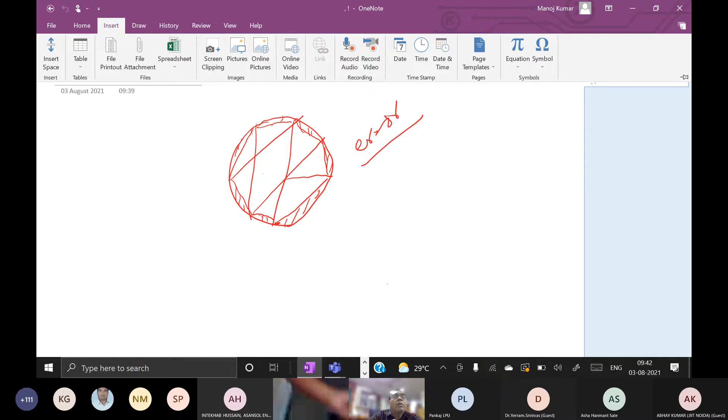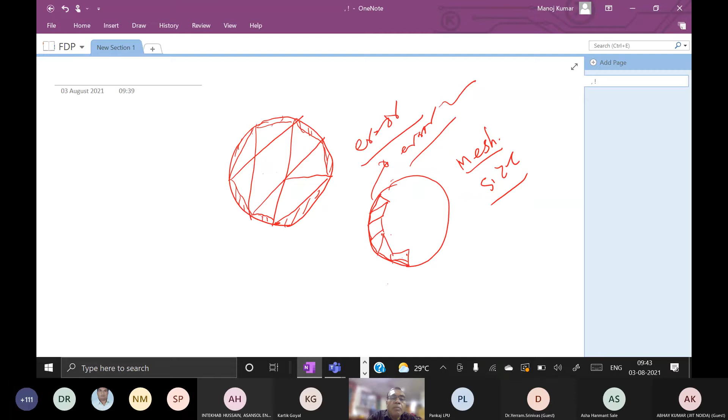Okay, not getting the pen over here. Now make the small sections. Okay, so this way we are able to reduce the error, you can see. So in this next discretization, what are we doing? We are just reducing the cell size or mesh size, so that we can reduce the error. So basically this structure, whatever you are seeing in 2D form, is basically the tetrahedron.

So FEM forms tetrahedrons in our structure, means the 3D form. And now there will be a global matrix and a local matrix. So basically what is happening? Your field distribution, maybe potential or anything else, we have to calculate at each and every point. Suppose we have 1, 2, 3, 4, 5, 6, 7, like that. This is the outer ring numbering. Inner numbering, you can see 1, 2, 3, like that.

So we have to find out what would be the global matrix and the local matrix. Along with the global and local matrix, there is also the coupling matrix. The coupling matrix is very important in the FEM. Coupling matrix means, suppose node number 1, you see how many nodes are coupled with it. This one is independent, node number 2 is independent, but this particular node is coupled with this cell, this cell and this cell.

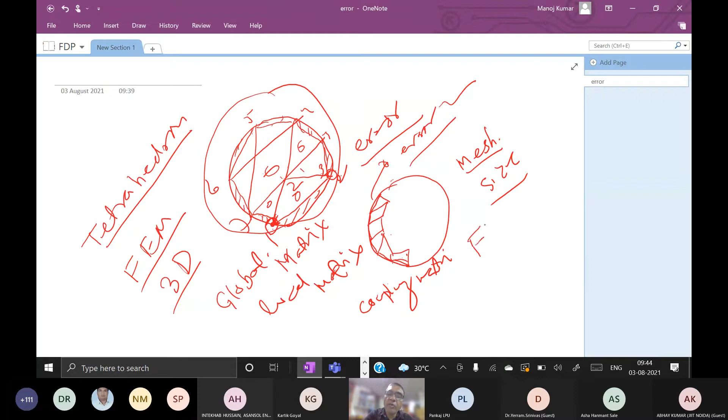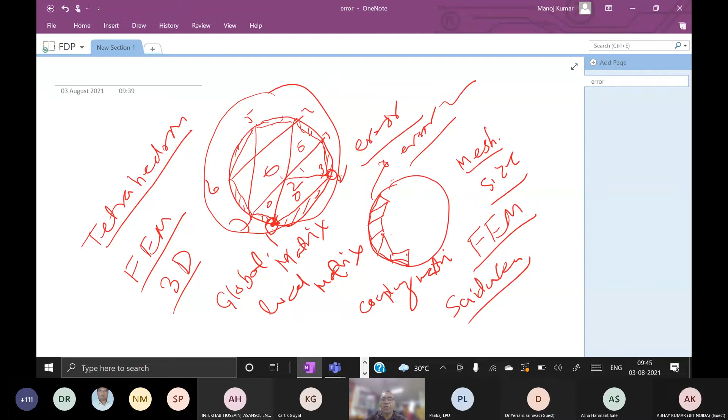So based on that phenomenon, FEM will take more time, so I'm not going into the details. This is the basic we have to understand. For that purpose, read FEM from any book; for your understanding, refer to Electromagnetic Field Theory by Sadiku. You will learn FEM and understand what is happening behind the software. That is very important, so remember this. Now I am coming to the software part. So everyone has this window, right?

Everyone has opened the HFSS window? Yes, sir. So in this window, you can see this particular portion, there is written project manager. You got this one, this project manager? Yes, sir. Okay. At the bottom, another window is properties, message manager and progress. So I think everyone is having these windows or not? Yes, we have.

So now see the first bar. This is the menu bar. You can see it's simple. Whatever menu icons we have, it looks like an MS Word or MS Office kind of thing. So we have in the menu bar file, edit, view, project, tools, windows, and help. So these are the menu bars.

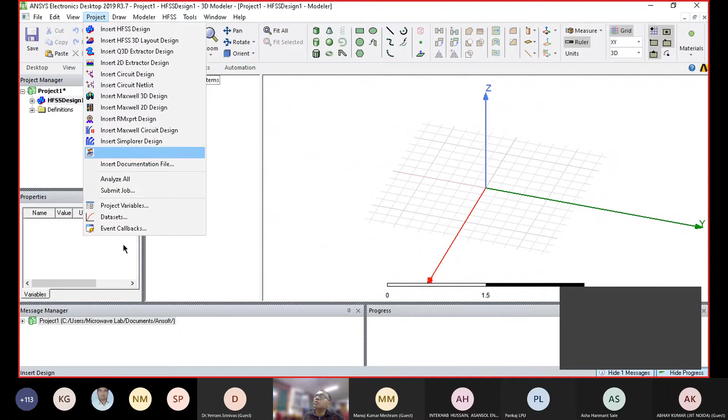Based on that, you can also see analyze. Once you make a project over here and save it, once you do analyze, you can analyze using this analyze all. All those icons, all those menus, it is also noted over here in these menu icons. It is there.

Now you can see, again I come to the initial windows. So you can see here this portion, it is visible. First, I have to open new, new file, the project.

And this is insert HFSS design. Before, we don't have anything over here. I'm just closing this one. Initially we don't have anything; all the menu icons are hidden.

They are inactive except new, open, and open example. Rest of the icons are inactive, right? So to make it active, I just click either here from the new, create a new document, or from file. Both are same. So once we have the new, once we open one project, you can see this bar, all the icons are active, except the edit one, because we don't have any drawing over here. That's why it is inactive.

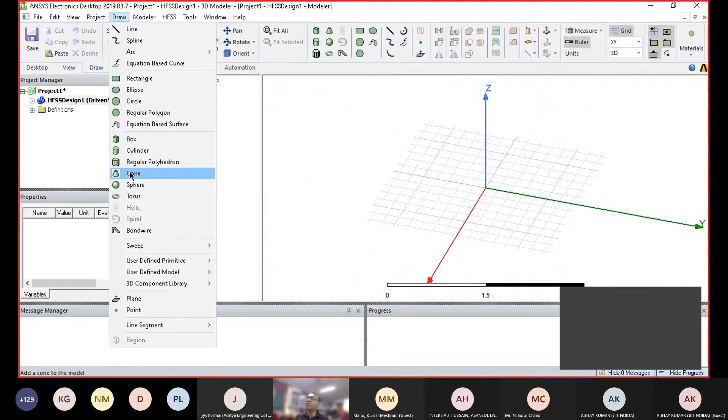So from this draw, you can use here or here. Beginners, they can just practice from here. In the beginning you just practice from here, don't move over here. I can hide this menu bar also, menu icons also.

Now modelers, this modeler is very important. Now 2015 guy, they can click modeler. Do you have the modeler? Yes sir. Okay, in the modeler, did you find the import and export option now? Yes sir, okay now you happy right?

So you will find the entire thing. There's few variations because every time they did some additions in the next editions, that's why little bit icons and many things will change. Rest of thing remains same, analytical method will remain same, because in the higher versions they are just making our life easier.

In lower versions we have to draw air box to define the radiation boundaries, but in higher versions we are creating the radiation box. This is the difference, I will let you know. So here import, export, and other things you can see.

Here assign materials, in the modeler you will find entire things, whatever you would like to do. So in the modelers option, remember...

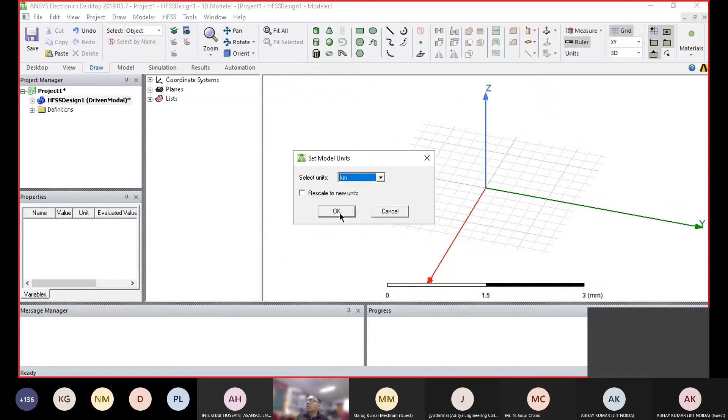But it can make, suppose in kilometers, so you can see, go to the modelers, change the unit, suppose kilometers. This scale changes, so this 0 to 1.5 area means here to 1.5 area about up to here. This is 1.5 kilometers and rest of the area is another 1.5 kilometers, this is a division. Are you getting this one?

So in the modelers, we have import, so you can import the files. You can import from anywhere from your computers, and these are the formats available with you.

Suppose if you would like to import your file from CST, import your file from any CAD files or any DXF files, you can use any one of these formats. These are the formats available: AutoCAD, DXF, these are the formats. If you have any format, then you can export over here or say import over here.

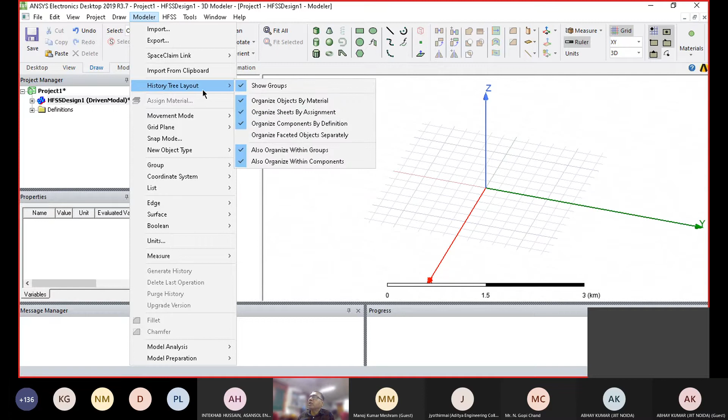Similarly, anything you can import from clipboards, history tree layout, so you can see entire things. So these are the grid planes. You just make the grid plane. Right now it is grid on the XY plane. You can make YZ plane also. So you are just changing the planes. We can change plane over here also.

This window, we can see this window. It is visible. My mouse cursor is visible. Yes sir, yes sir, yes sir.

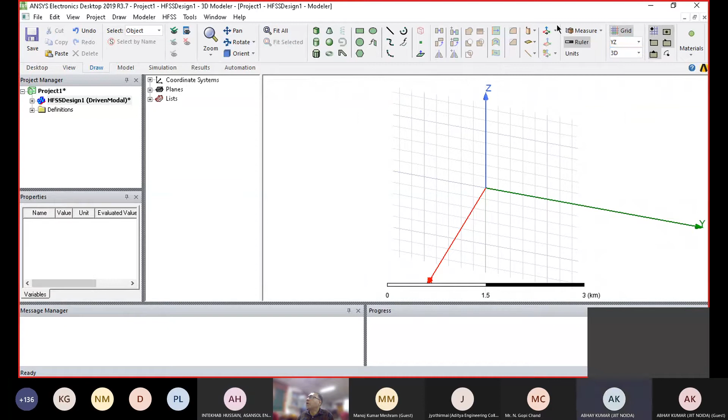So here we have the planes, YZ planes. You can see the grid window change. So which plane would you like to draw your structure? Accordingly, we have to select the plane. So by default, you will find the XY plane. But as per requirement, you just change the plane. Again, go to the modelers.

Group. So once you have the object, many objects, you can make a group. Group, ungroup, these are the things. Coordinate systems, you can make working coordinate systems. The working coordinate, create some local coordinate system also. These are things you can move, and accordingly you can move your coordinate system anywhere. And the list programs, you can create any list of the program, object list or face list, whatever.

Then edges means whatever structure edges you will find. So you can accordingly detach or create some object edges or move the edges, whatever. It's up to you. So you can do anything, any observation you can perform.

Surface. From the surface means structure surface. So in the structure surface, there are sections we have to connect. Right now we don't have any surface. Once you select the surface, then we can perform these options.

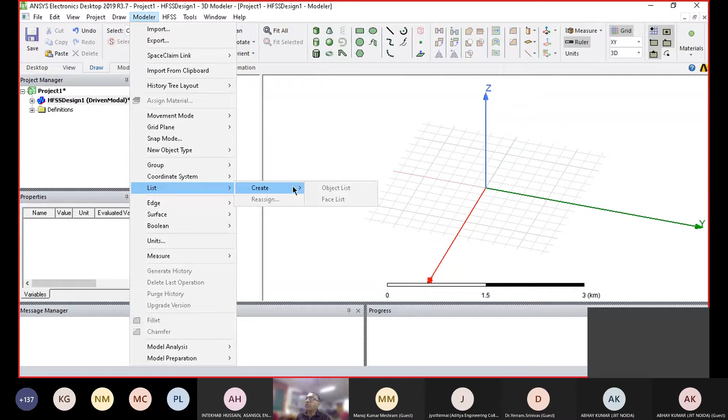Boolean. If you remember the Boolean function in the digital, okay, the same function you can unite. So if you have one or two objects, you can unite them. You can subtract, you can intersect, you can split. So these are the Boolean functions. This Boolean function is also available here in this window. It is right now inactive. These are the Boolean functions.

You can see this mouse icon. This is move. Here you can see this window. Now unite, this is subtract. This is intersect, this is imprint. Means accordingly as per requirement you can use this shortcut icon, but if you are not too much familiar, use the Boolean. Otherwise, once you have the icons, you can right click. I will demonstrate in a different way also.

Now the next icon is HFSS. This is very important because we are working on HFSS. So here we have to define basically solution type. There are various solution types available.

How many solution types do you have right now in 2019? Five. Can you name them? Network analysis, transient, terminal. Composite model. And what are the different options in this particular window? SBR, SBR plus. Yes, characteristic mode. Yes. Composite excitation. So model, you know the modal analysis, right?

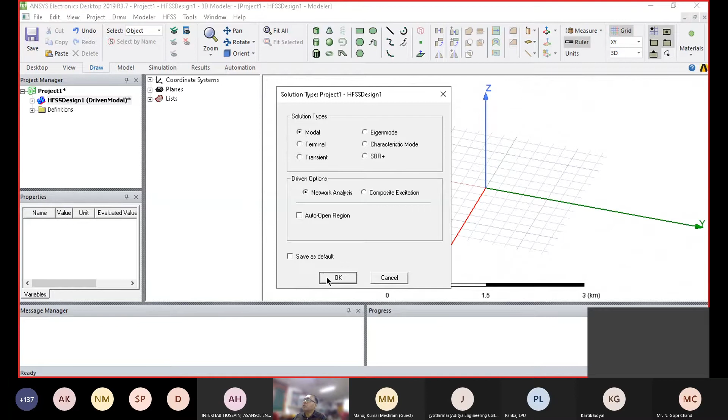And also driven option is there. So by default we are using the modal analysis. So modal is okay, so you can choose terminal also, no issue. Depends on the problem, we have to select it.

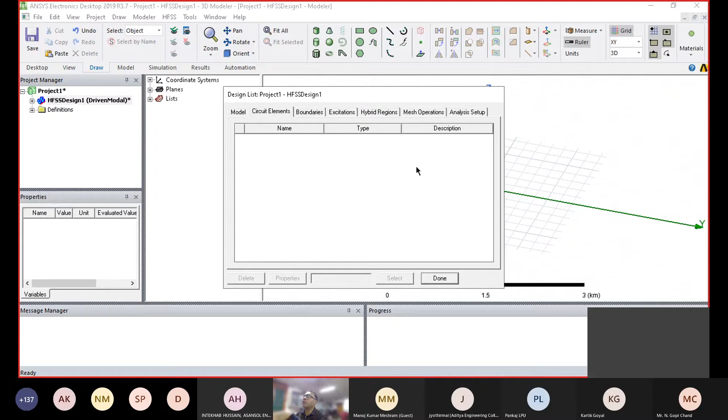Now again you can see list. So once you click the list, we will see the entire elements used in your HFSS structure. In the first model you will find anything like circuit elements, boundaries. You will find the entire thing. You can see one by one what is there. We will see later.

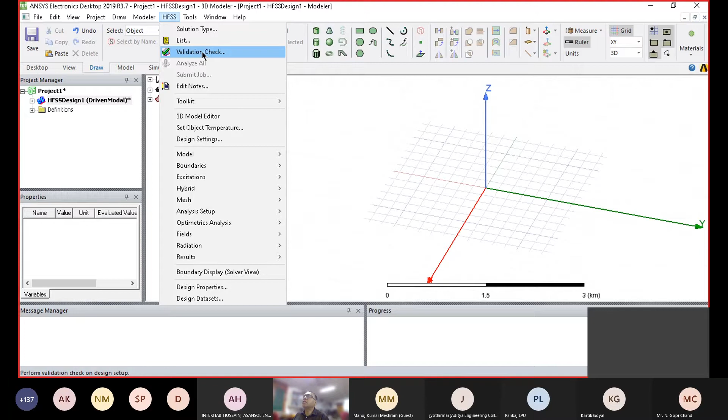Now validation checks. Once you make any geometry, any structure, before simulating it we have to check whether everything is correct or not. This is called validation check. So once you click this option, validation check, like I click on this icon, there is an error in the message manager. You can see there are no objects in the design. We don't have any design, that's why we got this error, right?

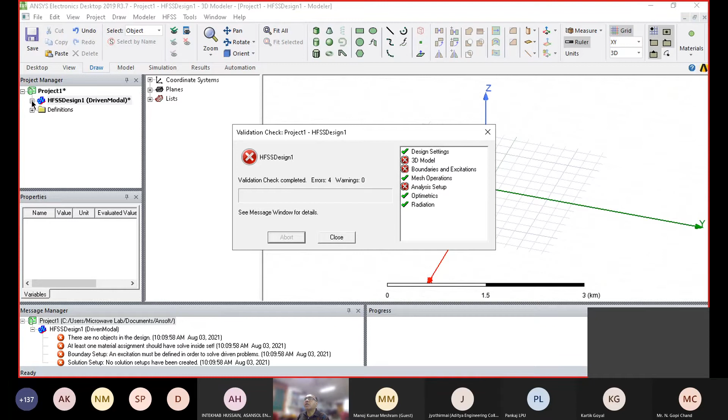It's the validation check. It is written 3D model, design settings. Design setting is okay, mesh operation is okay. This project tree is okay. You can see, first click on this one. In the design tree we have the entire thing set. But we don't have the 3D structure, 3D components. This is empty, so that's why the error is there.

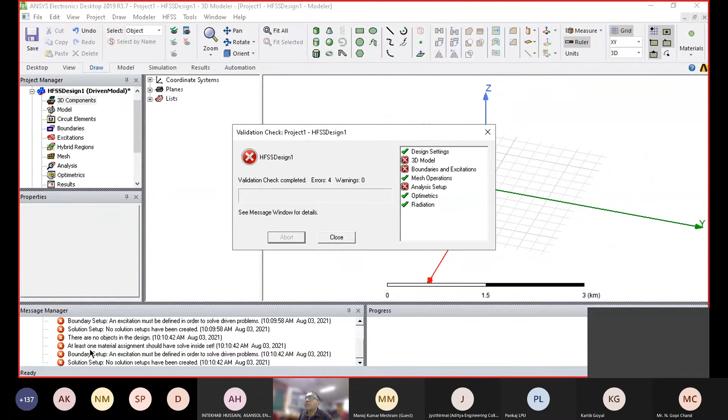Then boundary and excitation. Once we don't have the structures, we cannot excite the structures. That's why there's another error, the boundary error also. Then analysis setup. If we don't have the structures, we cannot put the frequency range and other things. We have to fix the setup. So that's why we have these 3 errors over here. I close this window and again come over here.

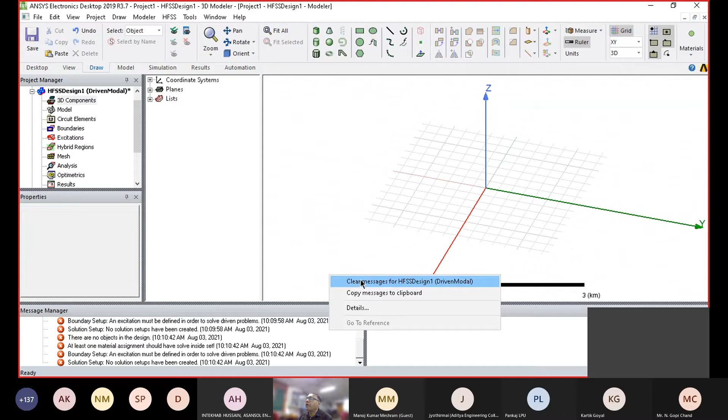Right click over here on this window. Just wait. You just right click on the message manager anywhere and clear messages for HFSS design 1, because this is design 1. So I cleared my entire message window.

Okay. Is it clear to everyone? Yes, sir. Yes.

And this analyze: once we set all the things and the validation check, we can analyze all. Sometimes it depends on our structures. In the beginning, once you have the starting structure, we will analyze the entire thing. In between, sometimes we change our frequency setup or something else, so we will analyze particular sections. We don't analyze all. You can see this one also. You can make any notes.

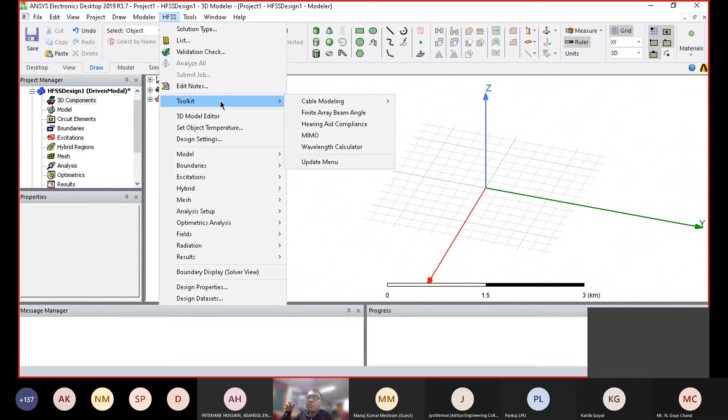Toolkit. The toolkit will give just ready-made solutions. With the help of this toolkit, you can import something and do anything. In the lower versions there is no toolkit, but in higher versions there is. This 3D model editor, so you can edit your modelers. The editor is here. Sometimes if you like temperature kind of things, you can set the object temperature also. Design settings you can change.

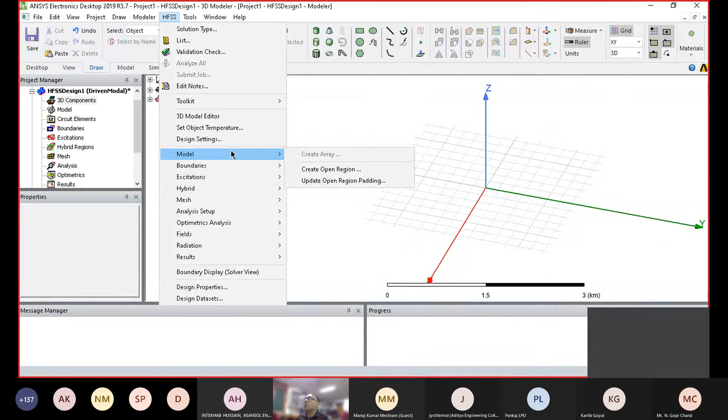And now the important thing over here, like model. In HFSS, once you would like to make an array, go to HFSS, model, create array. Once you have one structure, you can make an array of these structures. Also, as I told you, these are the new options: create open region and update open region paddings. These are new, not available in 2015. So instead of making the airbox, you can just create open region.

Boundaries, we have to assign the boundaries. These are the boundaries for assigning. Anisotropic impedance boundary, aperture boundary, finite conductor boundary, half space boundary, impedance boundary, layered impedance. So these are the boundaries.

Normally in HFSS, whatever structure you are considering, maybe a small one, you are using perfect E or perfect H. If you are defining the conducting layer, sometimes you define perfect E. It's up to you. Sometimes we define the master slave boundary also. This master slave boundary we define in metamaterial structures. Radiation boundary: for the free space boundary we define radiation.

Yes, please. Can you just be a bit slow? I'm noting down the different boundary conditions, sir. Just a bit slow, sir.

Okay, got it. So in the boundaries, boundary means boundary conditions. We are assigning boundaries as per our requirement. Like in the beginning, most of the time you are defining the conductor with perfect E, right? Am I correct?

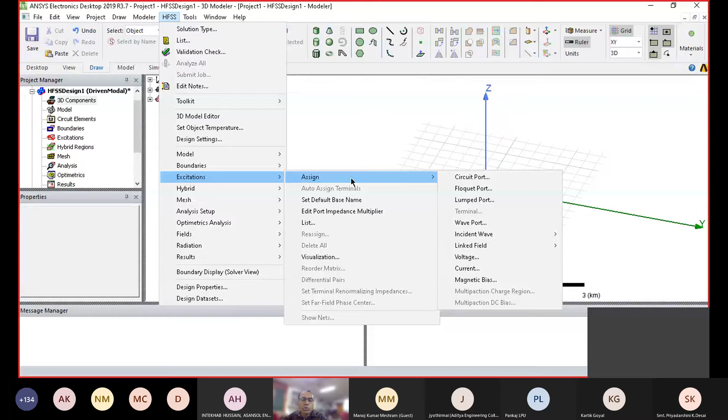Basically excitation means this is our electromagnetic source. Once we have any wire or patch antenna, we have to give some excitation. You can see there are various types of excitations. Circuit port is there. If you have an RLC circuit, we can define a circuit port. If you have a Floquet port, where is the Floquet port used? Any idea? Where can we use the Floquet port? For absorbers, metamaterial type structures.

That is fine. My question is different. When are we using the Floquet port? Obviously, we use it in metamaterial structures. But why are we using it there? My question is related to this. Why do we use the Floquet port with the metamaterial absorber? Why not use a lumped port or wave port? Any guess?

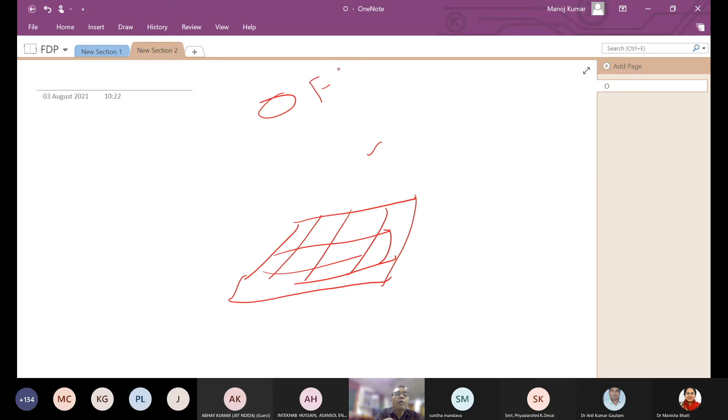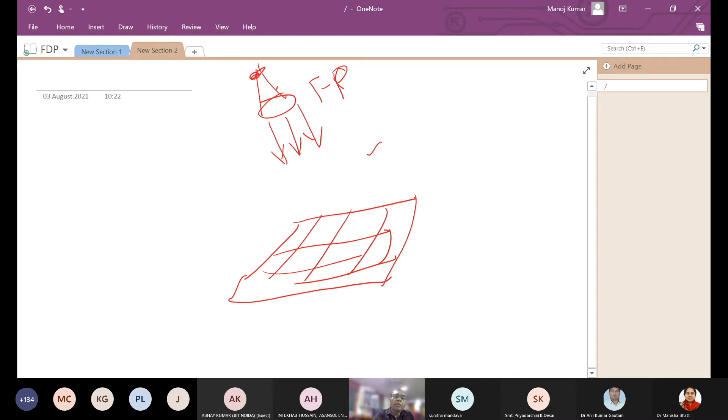Okay, so you just think about this. This one is a structure, any structure, and there is some source. Maybe this is the Floquet port. Okay, this one port, maybe some antenna. This is one antenna. So electromagnetic waves are coming over here. So what is happening right now? Just see this experimental setup. In the lab you must be doing it like this. You just think there will be some screen, and this side we have the antennas. Okay.

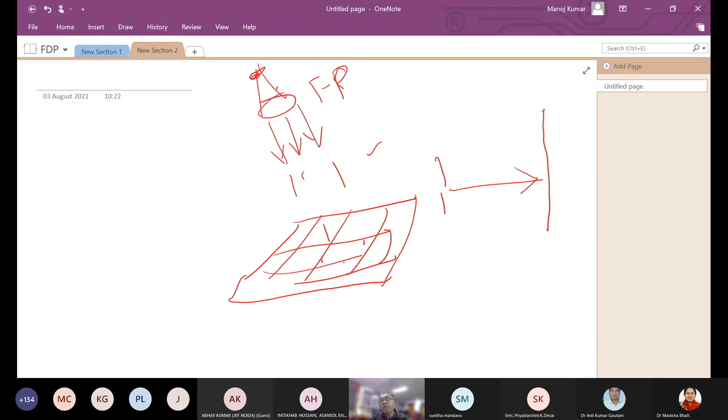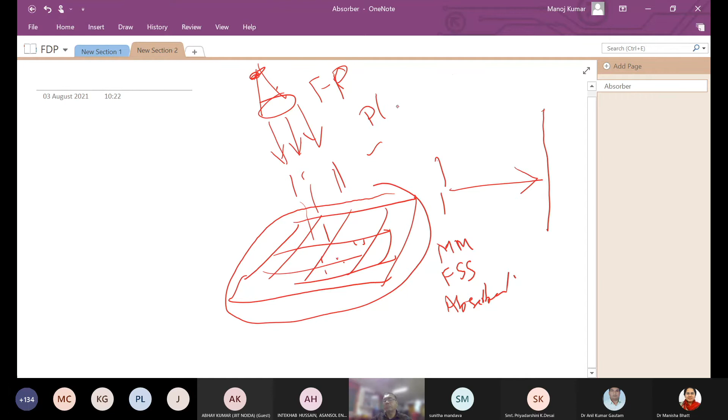Can you think about this one? So same thing, same arrangement we are making in HFSS. We have these absorbing boundaries, absorbing materials, metamaterials, FSS, or any kind of absorber we can say. And this is the incident wave coming over here, right? Okay, this is the Floquet port, plane wave. Are you getting the answer? Why are you selecting this particular thing? Yes, sir. Okay. So Floquet port, plane wave.

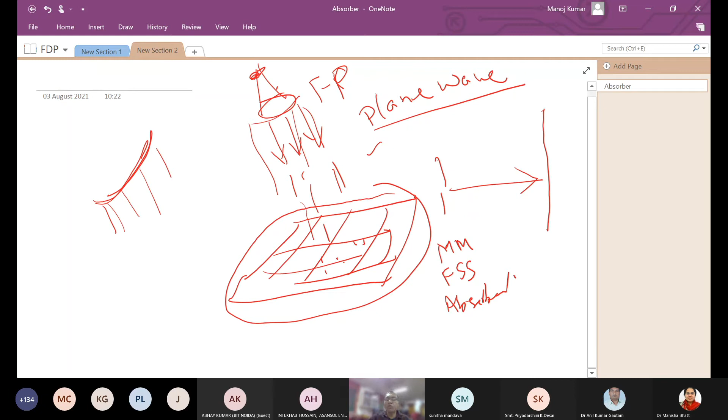The incident wave would be the plane wave. So we are making such a distance where the spherical wavefront will convert into the plane wave. Initially at the horn antenna or any antenna, we have the spherical wavefront that can be converted, up to a certain distance, into the plane wave, right? So with the help of these Floquet ports, we are converting to the plane wave so that your entire structure can be illuminated with this. Right? Is it clear?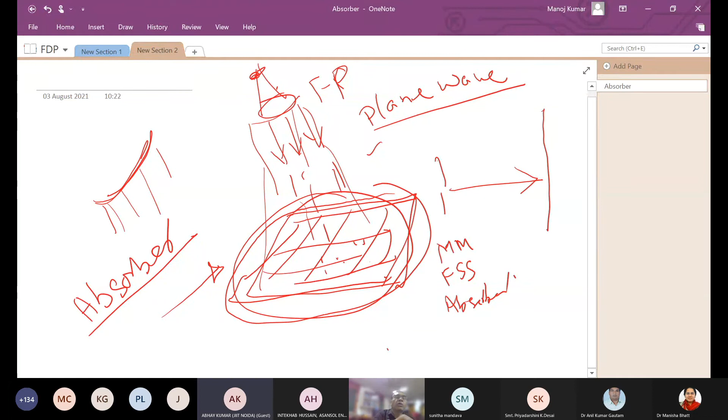Yes, sir. Okay. Suppose this structure is an absorber. If this structure is an absorber, then what will happen? It is going to absorb a specific range of frequencies. Yeah, so it will absorb the particular frequency signals, right? And nothing will get back. So how can we detect it? How can it be detected? On the other side, we need to use another Floquet port. So you need another side or the same side? Another side. Or on the same side also, we can see with some particular angle whether it is reflecting or not.

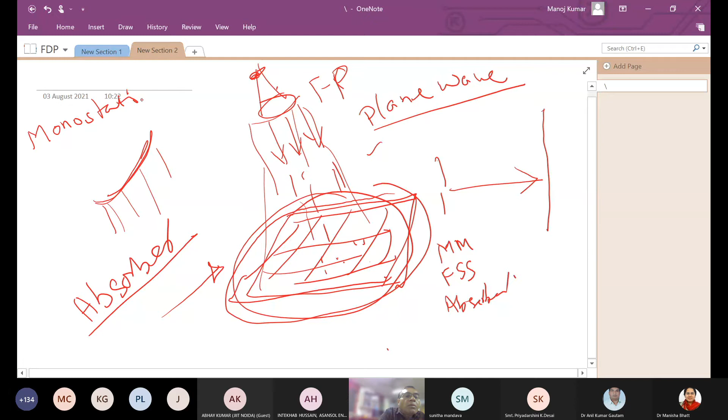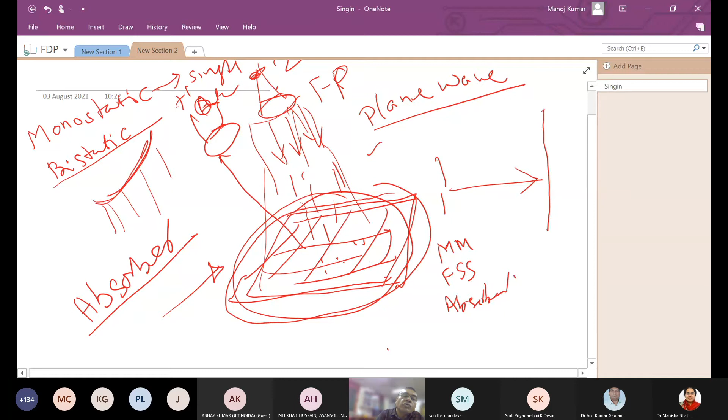Okay, so basically on the experimental side, there are two methods. One is known as the monostatic method. Another one is the bistatic. In monostatic, you will use a single antenna, for transmission and simultaneously for reception. In bistatic methods, we will use two antennas, number 1 and number 2. One antenna transmits, and the other antenna is used as the receiver. Is it clear? In the bistatic method, there will be one transmitter and another for reception. For the single antenna method, meaning monostatic, we will transmit and we will receive. Okay.

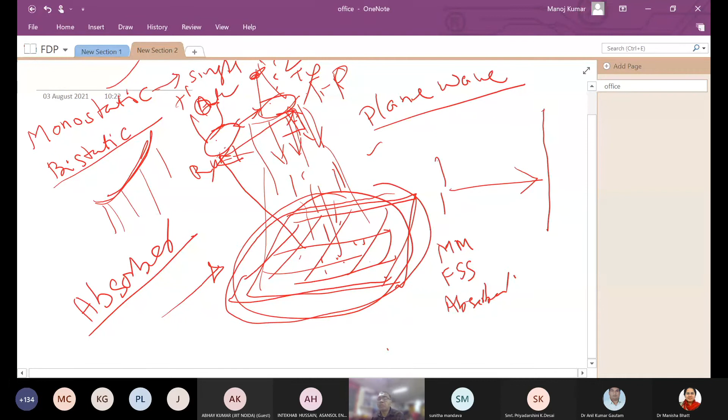Now, the important thing when you are using the bistatic method: the mutual coupling of these two antennas is very important. So you should take care of this. How much is the separation between these two antennas from center to center? It is very important. Now I'm coming to that.

Screen is visible? Is my other screen visible or not? No, sir. No, sir. No. Switching from one screen to another sometimes creates a problem. Still not visible? Not visible, sir. Now visible, right? No, sir, not yet. Just wait a couple of seconds. Visible now? Yes, sir, it is visible.

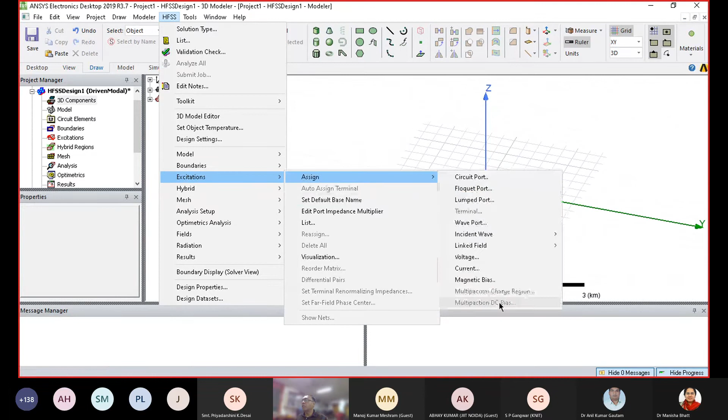And there are some auto-assign terminals. So, you know, don't use these. Use this assign and this one. For your applications, it will not be useful. Then,

hybrid. In old versions we don't have the hybrid; assign hybrid means you can define hybrid models. In the recent version, I told you initially HFSS used the FEM. Right now the hybrid method can be used. IE region means integral equation, so with integral equation you can use FEBI. SBR bouncing, there are many things. You can assign accordingly.

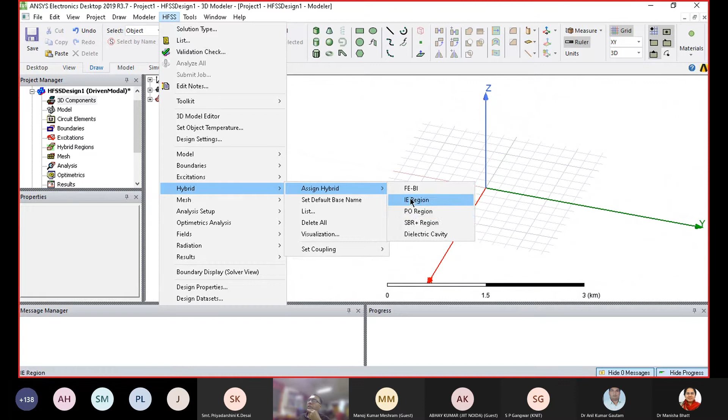The next very important thing in HFSS is the mesh. What you are doing normally is not playing with the mesh at all. Is anyone playing with the mesh of the structure? We used to do it in FEKO software, but here we don't. So by default, whatever mesh is considered by the software, you are very happy with that, right? Am I correct? Then why has this icon been added here? You are not playing with these: assign mesh operation, reassign, initial mesh settings,

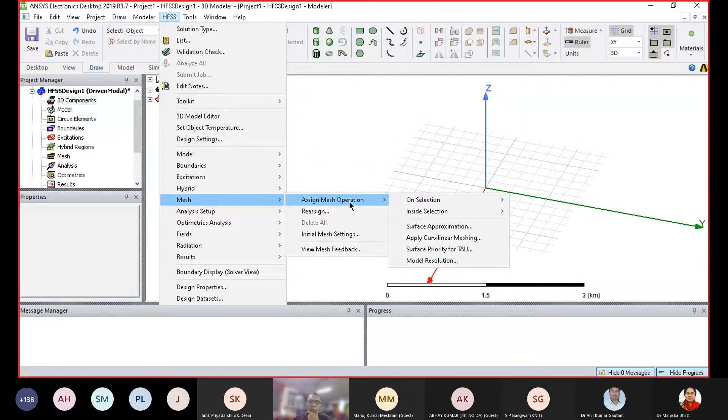view mesh feedback. Because FEM works on tetrahedral meshes, if you are not playing with these mesh operations, how can you assure your results are reliable? How can you check the reliability of your results? Whatever result comes, you say my result has come. But maybe you have had this experience: one day you simulated an HFSS design on your laptop or desktop, and after six months you simulated the same design on another machine, and you find the result has changed. Did you observe this?

Yes, sir. So is it the correct way? No, sir. What is happening? We simulated some results today; after 10 months we simulate again and the result has changed. So this is not the correct way. We cannot rely on those results. If the result changes from machine to machine, no one will rely on your results. So reliability is very important.

We have to fix the boundary condition, we have to fix the mesh operation, we have to fix each and every component. When you simulate the same structure, your entire conditions should remain the same, meaning your mesh operation should remain the same. Because depending on the RAM and processor of the system, it will calculate the mesh size accordingly. If your RAM will not support a higher mesh size, the system will calculate approximate meshes and give that result.

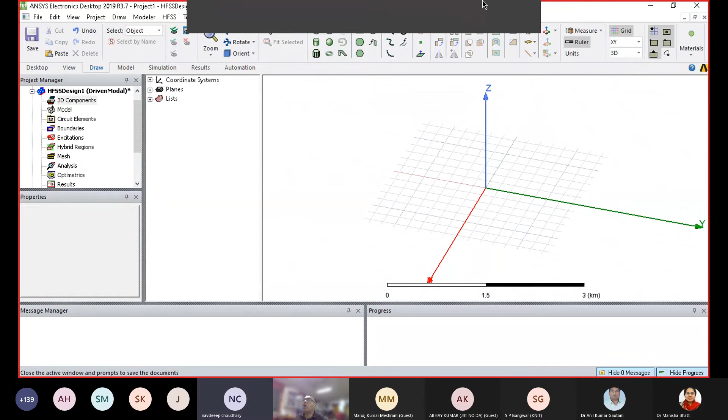Now it is clear. So you have to play with these. Mesh: initially, no need to play. Initially, whatever structure we have, we simulate it and look at the mesh first, what kind of meshes have been formed. Based on that, we can analyze whether our result is correct or not, reliable or not. We can learn this also.

And analysis setup. What do we do in the laboratory when we have a horn antenna or patch antenna? Simply putting the antenna on your rooftop or somewhere else, can you get radiation? No. We have to connect an electromagnetic source to the antenna. We have already connected the excitation part. Then we have to select the frequency range, make the solution setup accordingly, and define from which frequency to which frequency and which kind of solution we are looking for. Then we can start the measurement. The same thing here.

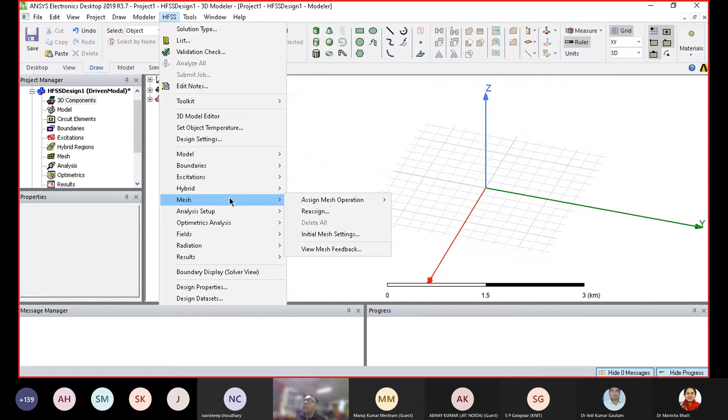Next, Optimetrics analysis. It is very important for optimization. In Optimetrics analysis we can add parameters, parameters from files, and optimization, so we can do sensitivity analysis, parametric analysis, and everything.

Am I audible? Yes, sir. Is the screen visible? No, sir. Yeah, because I got some messages like that. Now visible or not? No, sir. Still not visible? No, sir.

So, okay, we can continue. The HFSS is opening on your desktop, right? Yes, sir. Okay, so you can see your screen. Then Optimetrics analysis. It is on your screen, right?

So you can perform any analysis: parametric analysis, optimization, sensitivity analysis. Sensitivity analysis means it is a function, any function which can be differentiated with respect to any dimensions or any parameters. Like suppose you'd like to do the sensitivity analysis for your permittivity, how your dimensions are affected with respect to permittivity.

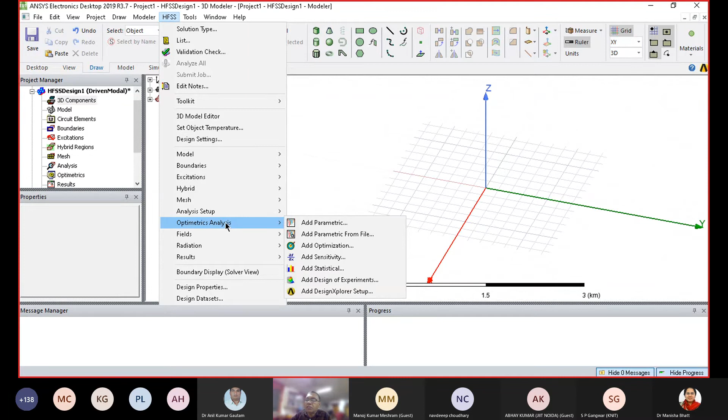So next, this Optimetrics analysis is available in all the versions, right? There will be no issue. The next icon, you can see the fields. It is very important again for calculations.

And also, how many guys are working on MIMO antennas? Is anyone working on MIMO? Yes, sir, only Pankaj. Okay, Lovely Professional, LPU. Pankaj from LPU. So in MIMO antenna, are you using a number of excitation sources, port 1, port 2, port 3, port 4, like that? Yes, sir.

So did you fix the sources to each element? Like I'm clicking on edit source, here. Right now we don't have ports. So here the magnitude is 1 watt, 1 watt, 1 watt to each element. Have you used this one? Yes, sir. And sometimes matched termination also. Did you use the matched termination?

Because in MIMO analysis, when you would like to calculate radiation properties or other MIMO characteristics like diversity parameters, at a time one port is excited and the rest of the ports are matched terminated. Experimentally we do the same thing for analysis purposes. But practically all the ports are excited at the same time. For analysis we cannot excite a signal from all the ports at a time, so one port is excited and all the rest are at matched terminations.

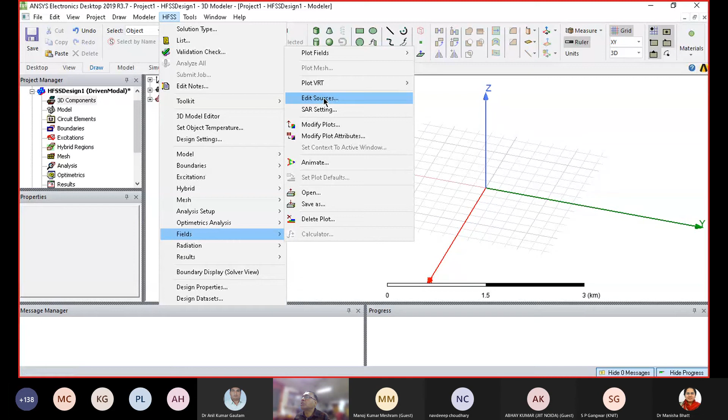Then how will we apply matched termination in the simulation software, HFSS? Because in all the ports we have the source 1 watt, 1 watt, 1 watt. You can change to 2 watt or 100 watt, no issue. But how can we convert this source into matched termination? We can apply the signal on one port and 0 watt on others. Exactly. Going to fields, edit source, we change the value to 0. One port with 1, rest of the ports 0. This is very important.

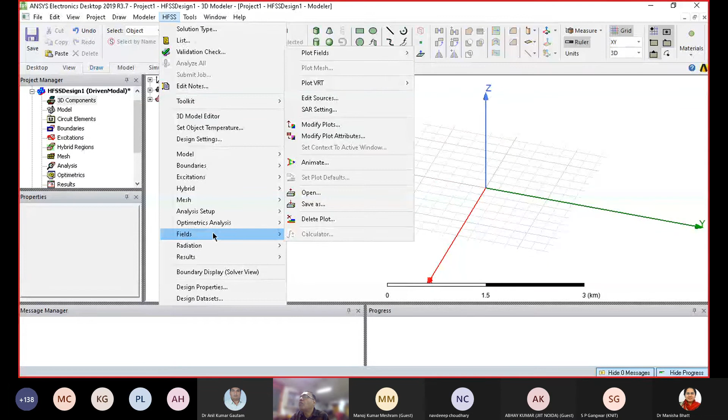Now, there are also SAR settings if you would like to perform those. You can also plot fields and animate how the field is moving. So these are the parameters available to you. You can perform radiation. In radiation, we insert far field setup, near field setup, antenna array setup, various setups. Normally we insert the far field setup so that we can get the radiation pattern. Right?

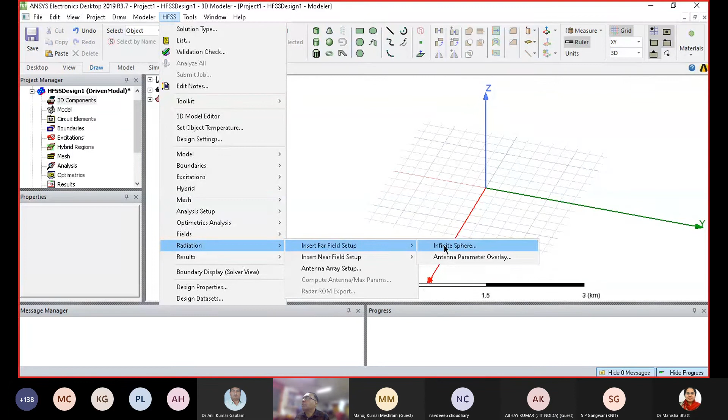Once you see infinite sphere - right now we don't have anything set. So first we have to define the radiation boundary, then we can do it. Okay, otherwise not.

Results you can see in various formats. First we can create the report from file. You can delete the entire report. The report template you can set it. Data set solutions you can see.

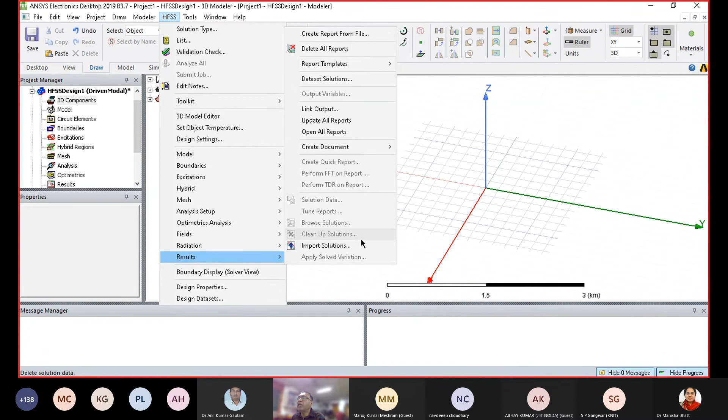And although there are cleanup solutions, most of the time what happens is once you have simulated your entire analysis setup, your results are stored as a cache file. So sometimes you delete and edit, but you are getting the same results. This is because your cache has been stored in your system. So we have to delete, clean up entire solutions. Once you click entire solutions, your entire result will be gone, meaning your failed calculation will be gone. Then you can start running and you will get fresh solutions. This is important.

Tools, you will never use tools. And basically help windows - we can see which windows are working, and help. If you need any kind of help, you can go here and HFSS topics are there, and HFSS PDFs are there. Accordingly, you can solve your problem.

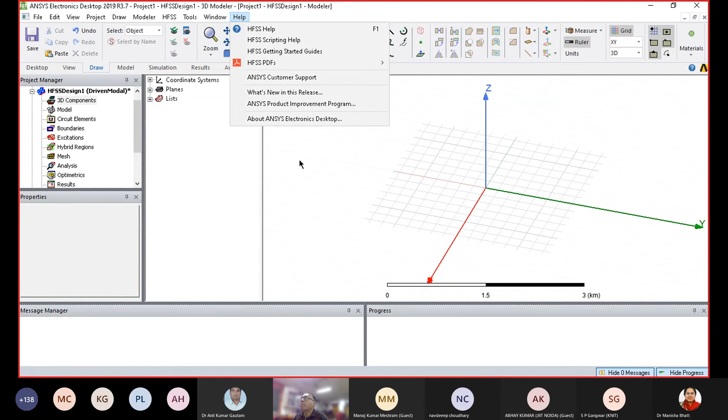So now we can start, or do you need some break?

So there is one question regarding solution frequency. What should be the values of solution frequency? It is the middle of the maximum and minimum frequency.

Depends on your requirements. Suppose we have ultra wideband antennas - solution frequency is directly related with the wavelength, and wavelength is related with the mesh size. Is it clear? So suppose we have a narrow band antenna, like a patch antenna with a narrow band. If you would like to design for 2 to 3 gigahertz, you can choose the center frequency as solution frequency, that is fine. Otherwise, if you will select higher frequency as solution frequency...

...your lambda will become smaller. Once your lambda becomes smaller, your mesh size will be very fine. Smaller the lambda, finer the meshes. If you select center frequency, your lambda will be a little bit bigger, and that's why your mesh size will be bigger, then you have to play with the mesh size. If you select lower frequency, your lambda is higher, and because of that your mesh size will be higher, so you will get an error over there - that error is called truncation error, meaning you cannot cover the entire geometry. You will see later on how it plays out.

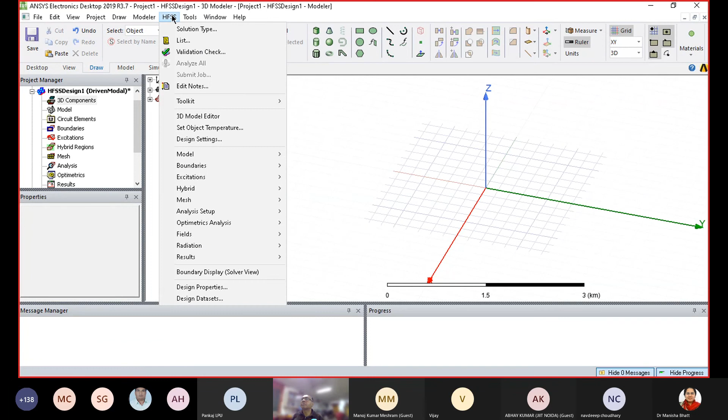Anything else do you need to learn in the software right now? Then we will see the one demonstration.

Sir, I have one question. In HFSS, we have the solution type. Can you tell me, sir, if we have a human structure, if we want to simulate the human structure, which type of solution type we can prefer? Human structure means, just like if we want to see the SAR of any antennas, like any mobile antennas.

That time we will use the FEBI boundaries. You have to use the FEBI boundaries. If you use other boundaries, it will take a lot of memory and a lot of time. The FEBI boundaries will reduce your time as well as the space.

When it finds a complex structure, even suppose you have reflector antennas, you use the FEBI boundary, along with the IE regions. So you just make the hybrid solution region. FEBI along with IE depends, and also you can use discretization, and different sections can be assigned different solution regions. When you combine all, you will get a single solution.

Is it clear? Yes, sir. Yes, sir.